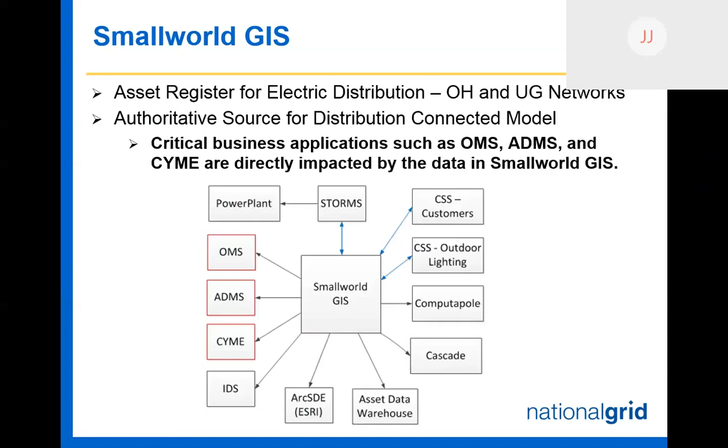So, data management and quality. There could be significant data quality impacts if conflicts are resolved incorrectly. Remember to consider that more recent information may have been posted to GIS top since your design was created. You should not blindly submit your work request or file changes to top without reconciling your changes with each difference in top. You may be presented with conflicts that don't appear to be related to your work. If you're unsure about how to handle the conflicts, ask for help from another super user. Data monitoring processes will identify errors that are created by incorrectly resolving conflicts, which could result in retraining or revocation of conflict resolution privileges.

All right, so now we're going to start going through some of the material: the definitions, conflicts, how conflicts occur, conflict resolution, some examples, and helpful tips.

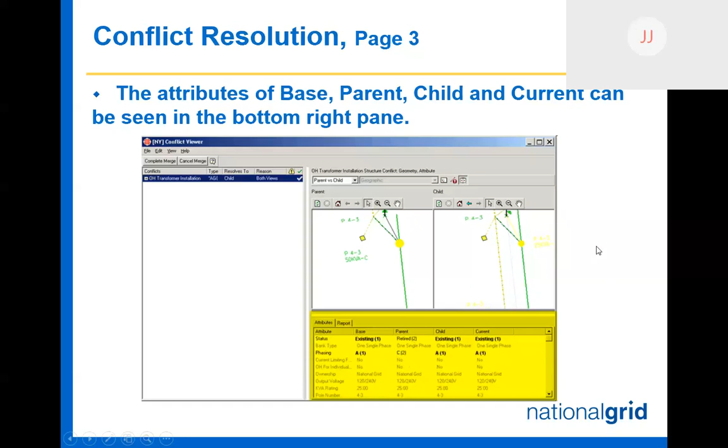The top right pane shows how the object looks, parent versus child, in GIS, giving you a graphical view of what the difference is. In this case, this was a transformer installation that was retired. You can see in parent how you get a graphical view of what the differences are. So if annotations moved, it's going to show you that difference.

By default, this opens up to parent versus child. There's a drop-down menu right here where it says parent versus child, and you can switch that to, say, base versus parent, if you wanted to compare the design when your work request was taken out versus how it looks now. I'll show you how to do that when we get into the live examples.

The navigation in these windows is pretty much the same as out in the main GIS. You've got the hand tool so you can pan around, you can zoom in and out, and there's a home button that will center the map view right on the object you currently have selected for conflict resolution.

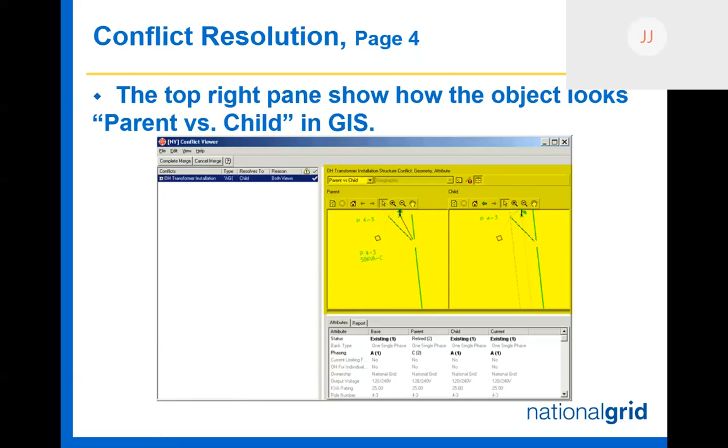This is where I was talking about getting into hybrid conflict resolution, where you may want to keep some attributes from one of the data sets but keep the geometry from another. You can go in and edit those objects in the GIS editor, and I'll show you how to do that. You right-click on the object in the left side of the conflict pane and select Edit Object, which brings the object's editor up in GIS.

From here, you can do a go-to to see how the object currently looks in your work request or file. You may also make changes directly in the object's editor rather than selecting parent or child. These updates will be shown under the current column.

An example of that would be: you move the pole in your work request, so in turn the primary moved. But in the meantime, somebody went into top and changed the phasing on a tap, going from A to C phase on a single phase tap. So you want to keep the geometry change you made in your work request, and geometry basically means the object's location.

You're moving it, and you want to keep that change, but you also want the phasing change. So you get into where you need to go, click Edit, and go in and change that phasing in the editor. I'll show you how to do that when we go through the live examples.

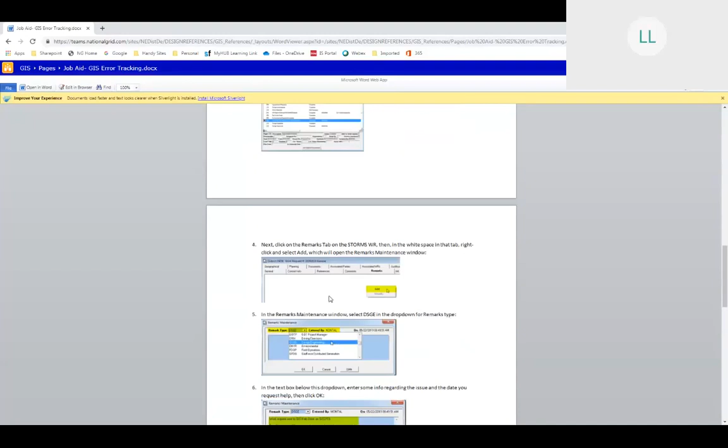So the next couple of pages just talk about adding that additional requirement and what we're specifically looking for in the design remark. And then we're going to have a report coming out for that. So that's there for you to refer to on the SharePoint site.

And for our issue tracker, that one's over here. All right, so I looked at a couple of these yesterday, and I think some of them are closed out. So let's see, I think it was probably this one -- Marcial, this one of yours, I think that was closed.

So on this list, it has a number of items here, and if you scroll over it, there's going to be a block here that you can check. And then you go up here and you say edit item, and then pull up everything in a list here, and you can update it as you go. So I think this one here, Marcial, I think it was status 60 -- I think this one's resolved. Is that true?

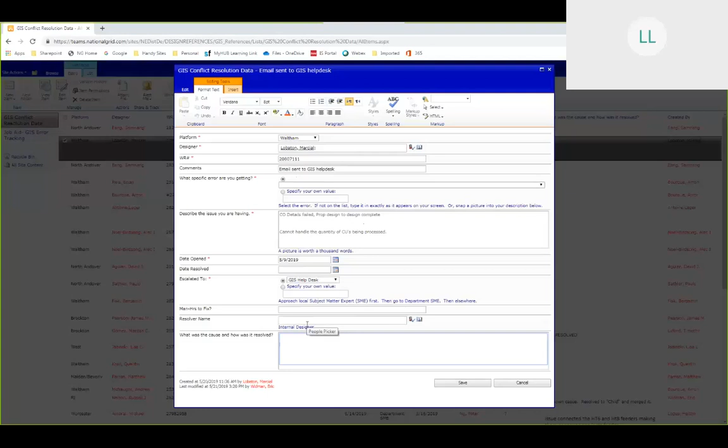If you want to add a new issue, you just click on one of these down here, go ahead and put it in there, and then reach out to the folks — if you can solve it on your own, do that. If you can't, reach out to somebody else to help you out, and at the very least the help desk. When you get the response back that it's fixed, ask them, hey, what was the resolution, how did you fix it? And if it was something a designer can do, or if it absolutely had to be the help desk, make that annotation in there as well to help us out.

So yeah, don't delete anything off of here, just update it as completed, and it'll scroll down — get shuffled to the bottom — and we won't have to look at them as much. Anybody got any questions on the job aid or the issue tracker here?

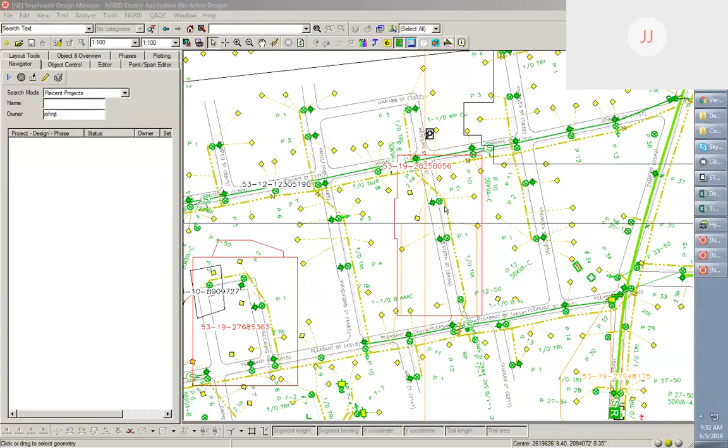All right, so I've got some teed up here ready to go, so we'll go ahead and start working through some of those.

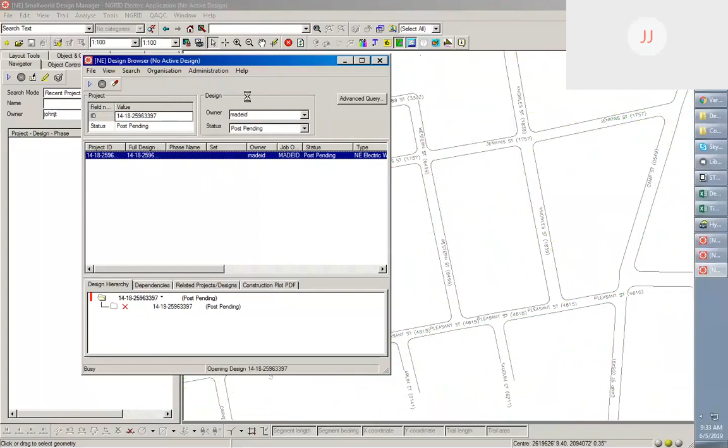I'd like to know where you're working because that speed is unbelievable — I've been opening up a work request for 15 minutes.

Yeah, I'm not — it probably is because it's read only. This one's post pending, so it's not writable right now, that might have something to do with it. But so this one, I'm just grabbing post pending work requests that we're trying to close out that have conflicts, and those are the ones we're going to work through. So I'm going to go ahead and do a refresh on this.

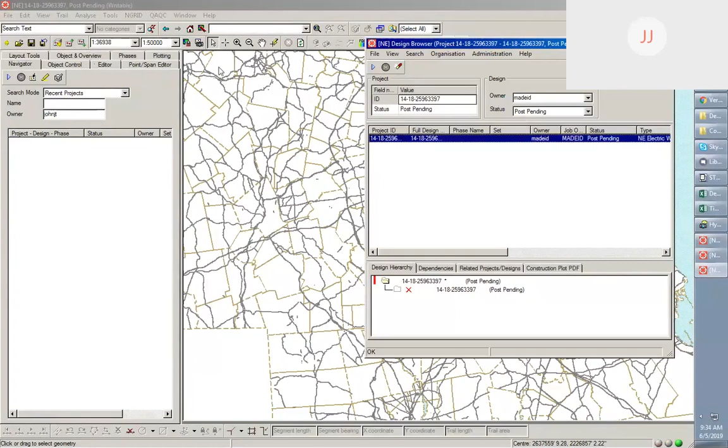So there you go, this is the pop-up that you get. I'm going to go ahead and click OK. And that is going to bring me into the conflict viewer.

Okay, so I'm just going to go through kind of the functionality of the viewer really quick. I mean, we looked a lot at this stuff in the PowerPoint, but so over here on the left, you'll see this is my list of conflicts. So this is every object that I'm going to have to go through and take a look at and resolve conflicts on here in this work request.

You can look at them one at a time. If I just click, you see it's taking me to where the conflict is and highlighting it for me. Or I can select multiple at once — so if I just click this first one and then click the shift key and click on that second one, it's going to allow me to look at both of those conflicts at one time. So you could do that with all of them if you wanted to.

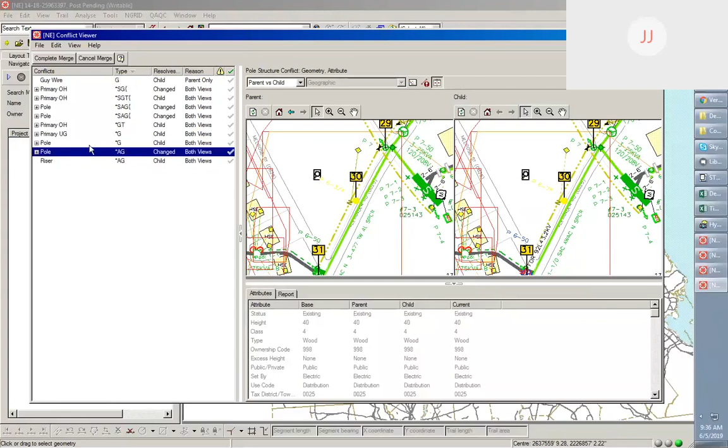Can I ask a question? When you clicked on pole before, down below, nothing was highlighted between the base, parent, child, and current views. Did you say something should appear there? Yeah, generally it should. When you're grabbing a bunch like this, it looks like it only shows you the first one you grabbed, so you'd have to go through each to figure out how you wanted to resolve it. You can resolve multiple conflicts either way, but there are pretty limited circumstances where you'd want to. But isn't the only place to figure out what you want to resolve to that space below, comparing the different views?

Right, so when you select multiple here, you can look at it graphically in the window, but if you want to see the attributes, you've got to select them one at a time.

The other thing you see over here, I've got a bunch of objects with a plus next to them. If I start clicking on those, it shows me any child objects that may be underneath, so you'll want to take a look at those as well if it has them.

You can see it changes how they look based on whether there's a conflict or not. Out here on this piece of primary, all my attributes up top are in this light gray color - if you see them in light gray, that means there's not a conflict. But if I scroll down to the bottom, you can see a difference with the route geometry, which is basically the way the wire runs and how it's snapped up to the poles. And then I have some other conflicts here for annotations.

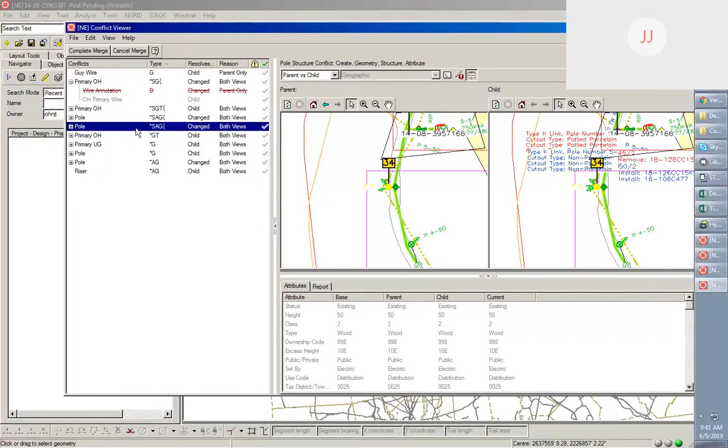So again, if I went in and made changes and wanted to use that cancel merge, but I had already resolved a couple conflicts, it's going to want you to use the undo to last save button right here. You'll click on that. It'll say, are you sure you really want to do that? Click yes, and then it'll come up and say that conflicts were not handled, and then you can go ahead and get out of the work request.

Again, that would be for if you weren't sure what you were doing and you wanted to get out and have somebody else take a look at that.

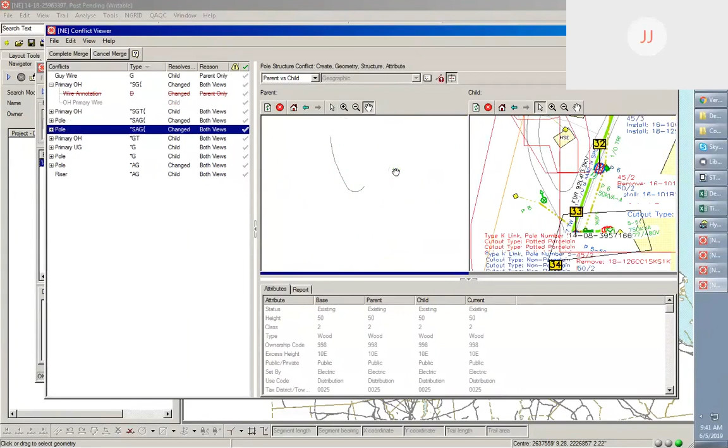Over here on the right side, you've got the graphical map view. So when you start clicking around on the different conflicts, it's going to go ahead and update that. Interacting with this is pretty much the same as you would out in GIS. Like if I use this pan tool, it's going to take me around and change the map view. If I look at something way far away and I want to get back to what I was looking at, I just click on that home button. You can also use the back and forward button right here to go through your changes. Like I said, this is pretty much the same as it is out in the regular map view in GIS.

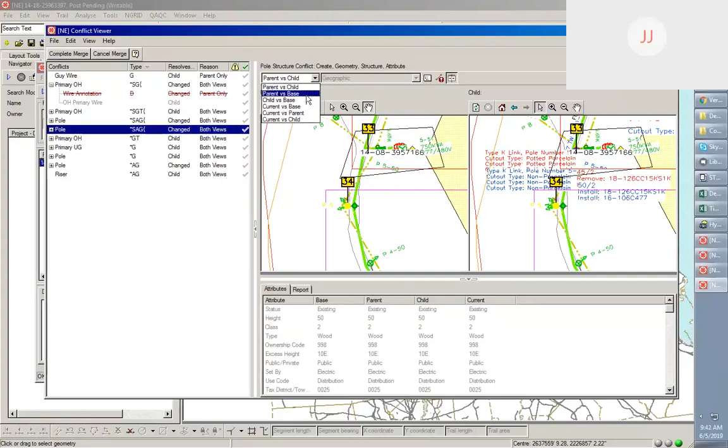Now, if I wanted to, say, compare base to parent, all you've got to do is click here, and we'll do parent versus base. And then you can see that it updates this map view here. So most of the time you're going to want to stay in parent versus child, but there may be situations where you want to switch the map view to see the differences in the map view. That's how you do that up here under this menu.

Okay, and then down on the bottom here, you've got your attribute list: base, parent, child, current. Again, attributes that are not in conflict are going to show up in this light gray color. So you want to scroll all the way down the list and look at what changes have been made.

So you see here, we've got a conflict on this foreign pole number right here, and we also have one for the GPS location as well. So you want to look at these attributes that show up bold like that. Attributes where there's no difference will show up in that light gray.

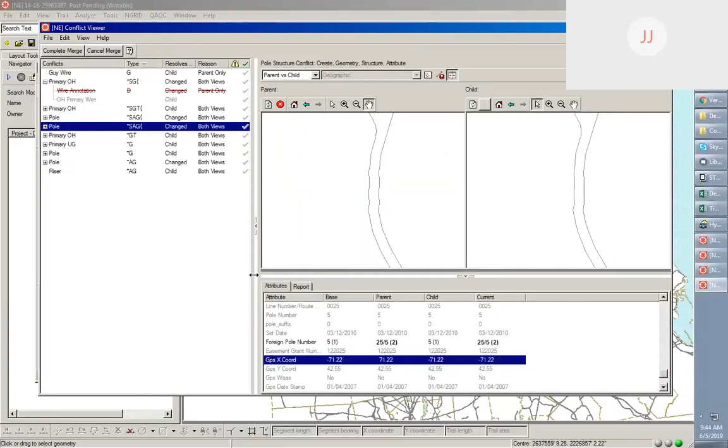As far as configuring this, you can grab, if you hover right over the middle here, you can take this and resize it, if you want to see more or less of the conflict list. And then you can also collapse that totally - there's this little arrow right here. If I click on that, that's going to collapse the conflict list. Click it again, it's going to bring it back. Same thing with this one right here. If maybe you wanted a little bit more space to compare, you can do that. But most of the time you're going to want to have both of these menus open and visible.

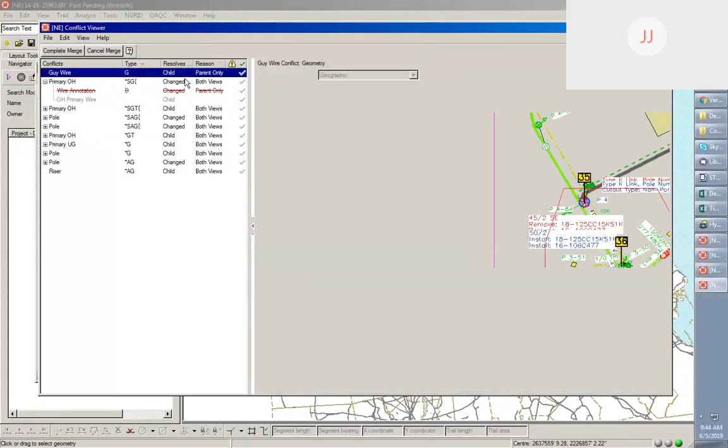What else am I missing here? So when we go in and start making changes, you're going to see you've got this checkbox right over here to the right. When we go in and interactively make changes doing conflict resolution, it's going to automatically put a check mark next to this.

If you get into one of those situations where you don't need to make changes to what you're resolving - say it picked child, like for this one right here, and we wanted to keep child - you don't have to change that, but you can go in and put a check mark next to it so you know, hey, I looked at it, that one's good to go. But if you go in and use the resolve tool, it's going to automatically put that check mark next to it. So just a handy tool, you know, with these bigger work requests that have been sitting out for a while. We don't really have a ton of conflicts in this one, there's like 10, 8, whatever.

You know, we do see work requests that have been sitting open from time to time. They might have like 50 conflicts. So it's a lot more time consuming going through that list, and obviously you want some visual indicator of what you've already looked at.

All right, so I'm just going to go through this first one here and show you guys the resolution, and then we'll go through and I'll pick people from the phone, and you guys will get to pick what you think we should be picking for the conflict resolution. So when you want to pick your resolution, I'm just highlighting one of the conflicts, and then I right-click on it, and that's going to bring up this whole menu here.

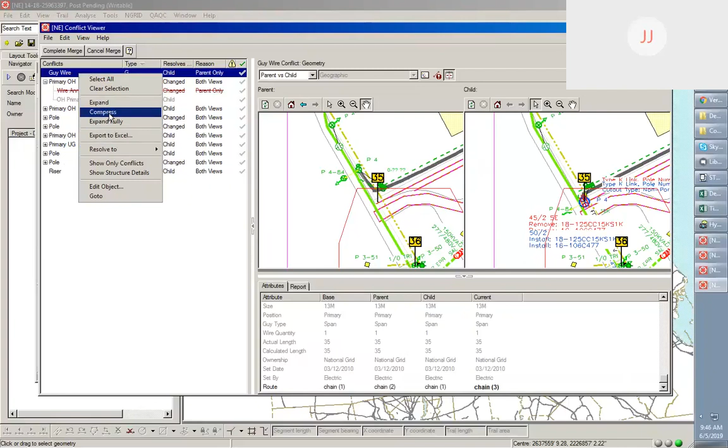So the Resolve menus here, you see I've got that parent-child base, and then you've got the expand and compress where it will open and close the objects if they have child objects. And then this one's kind of handy - a lot of times you're going to want to see all the information, but if I click on Show Only Conflicts, that's going to get rid of any objects with child objects that don't have conflicts between the different versions. So it kind of simplifies what you're looking at.

You can also do a go-to from here. That'll just pan you over to the object, and then this is also where you edit, access that edit tool.

So is it keeping up in the WebEx? Are you guys able to see my clicks as I'm opening menus and things? Okay, I just wanted to make sure because sometimes there's a little bit of a lag. So if it starts lagging, just let me know and I'll slow down.

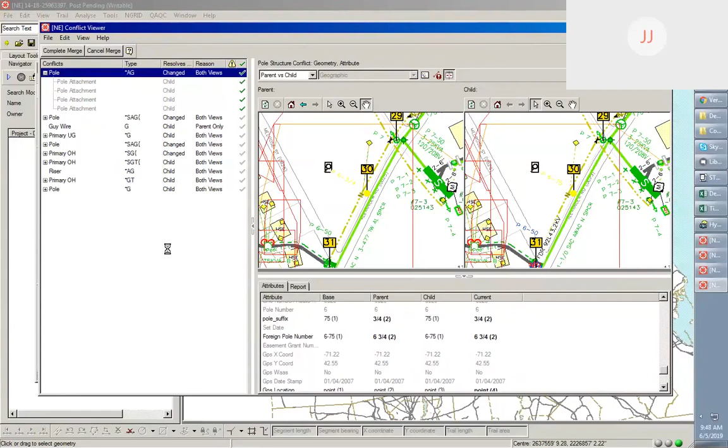So if I wanted to go in and edit this pole, I could do that. If I right-click here now and I go to Edit Object, it's going to think here for a second. There you go. And then you see I can go now and edit this pole if I wanted to make changes to it manually. I can do that. You just have to use that update button after you make the changes.

So like I said, you get into doing things like this where you can't really pick in between what's in your work request and what's in top. There may be attributes from both that you want to keep, and this is how you do that.

So any questions on the functionality of the conflict viewer so far? All right, I'll take that as a no. So I'm going to go through and we're going to start doing conflict resolution on this.

So this first one that we've got here, we've got an attribute change and a geometry change. So I'm just looking at that right here, and it'll tell you up in the pole structure conflict, geometry, and attribute. Again, geometry is just a fancy way of saying the location of it - something's changed with it. So you see these first attributes that we have here, no conflicts.

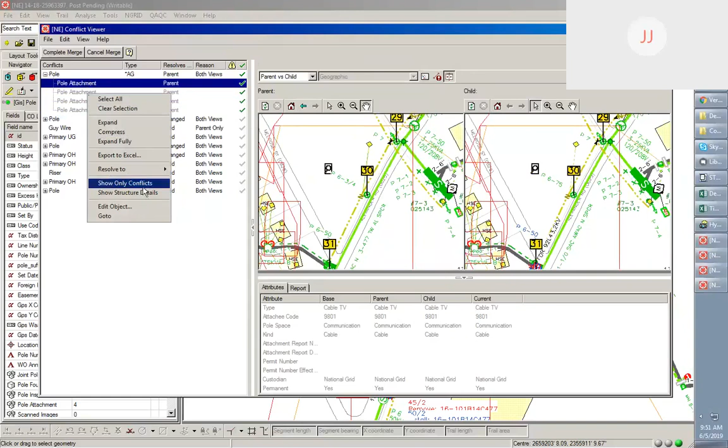And then you'll see in the conflict viewer here now, I've got check boxes next to all those objects. So again, you don't need to look at the child objects on this one because there's no conflicts - they'll show up in gray like that. Like I said before, you can shut those off if you don't want to see them, but there may be some instance you do. If you do want to turn the non-conflict objects off, click that show only conflicts, and then it'll go ahead and update your list.

All right, so we took care of that first one. The second one here, let's see what difference we have. So let's see here, we've replaced our pole. Here in the work request, we went from a 45 to a 50.

Then we have a difference here in the excess height. This is a 5 foot up in top, and in child, there's no excess height, so we were replacing it because we needed to go up. And you come down to the set date here, up in top, you see the set date 3/12, down in child, nothing because there is no set date, it's a replaced pole.

The set date will get set when it goes to close out. And then down here in the bottom, you can see we've got a bunch of different differences in the annotations. And if I zoom in here, you can see the difference in where that pole was moved. So up in top, it's over here.

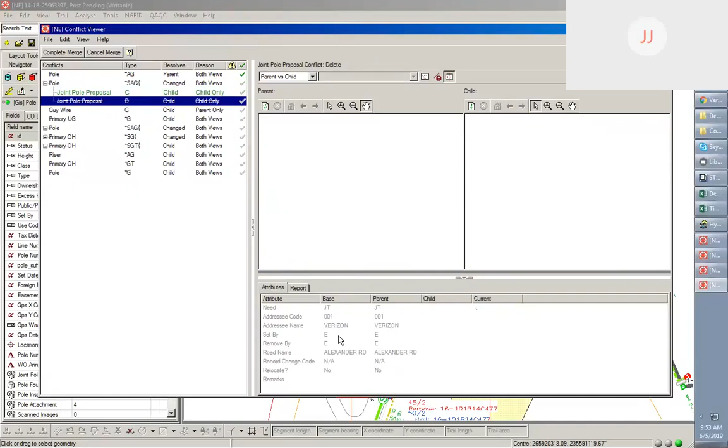That's just going to show up under child because the pole was replaced. And then if I click on this one, you'll see here's the JPP from the parent object. So this one, we're going to want to resolve the child. I'm going to right click and do resolve the child. All right, this was a good example.

So you're going to see if there's associated objects with your conflict that it wants to take together. If in this instance we've got a pole with a whole bunch of wires snapped up to it, it's not going to want to let you resolve just that part, it's going to take all those associated objects with it. So it's going to give you this pop-up. It's not very helpful at this point because it's going to tell you all these things depending on how you resolve the conflicts, it's going to show you all the objects here.

So I'm going to go ahead and click yes on this. And then you see it's showing me in the viewer, it grabbed all those objects associated with that pole and resolved them to child as well to take those changes. Now, this would be something that you would want to review. So for this pole and all these objects here, I want to take a look through them and make sure that there isn't anything we're missing, attributes that were changed.

So we'll start up here at the pole. We already looked at that. We know that this one's good. We want to take what's in the work request, okay? The guy wire here, let's take a look through here and see what's dealing with this.

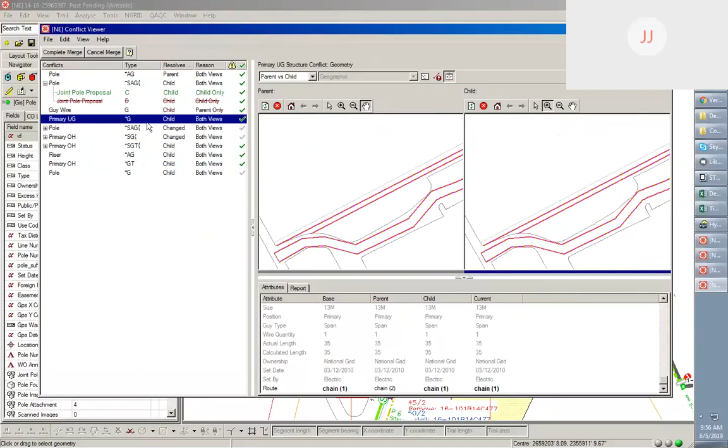On our primary underground, if I look here, you see the difference in the route. If I zoom in here, it might be a little bit difficult to see, but you see, I can see the old location where it was going over here to where the pole was previously, and then over here in child, it's now snapped up to my replaced pole over here.

All right, and down to our pole here. We're going to take a look at, or actually let's finish up with the rest of the ones that it resolved with our pole here. So you can see this piece of primary right here. We've got just some differences in the route of it.

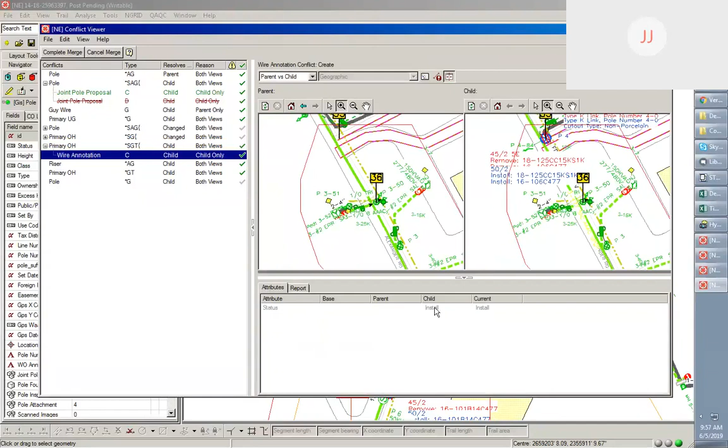And then you see the wire annotation. The annotation conflicts are very common. You're going to see those all the time, but this is just showing that we have an install wire annotation on the piece of primary here, and you can see that highlighted here in the window. So we're good on that one. So let's take a look at this riser.

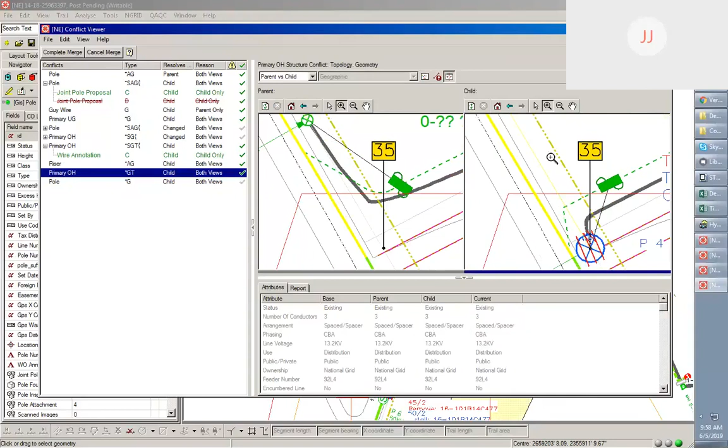So this one, yep, we want to keep — this grabs all the conflicts associated with that object. This riser is where we want it to be, it's in replace status. And same thing over here, we've got the piece of primary on the other side, just snapped up to that new pole location it's been corrected to. You can tell now that all these other conflicts were associated with how I resolved this pole here, with the check marks there.

And then you see that turns all those check boxes to green. Can I ask a question? So the child says 5 on the pole numbers where you were just a moment ago. So the child is what — right there, the child was what was changed in the work request, right?

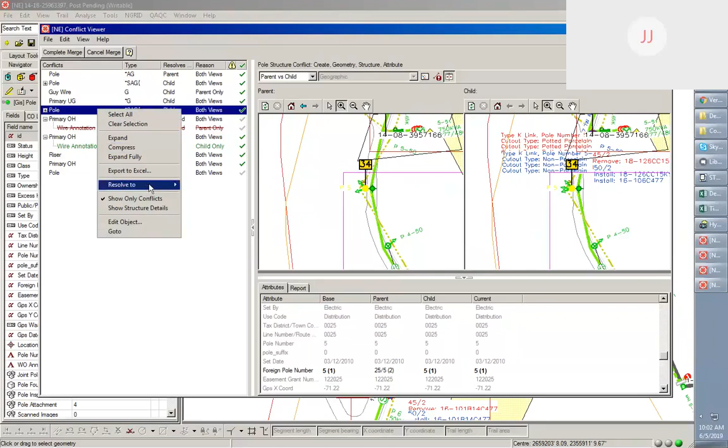So I've already gone in and hit — and this is what I was saying before — if you mess something up and think 'oh man, I really want to change that,' if I go back to that conflict and hit child, you'll see it updates current to what I set it to. So you can go in and make changes to that. Like I said, the complete merge is the point of no return — once you do that, you can't make any changes to the conflicts.

All right, so we've got a couple more to look at. We've got a primary OH here, you can see, and it looks like it snaps right up to — let's see, is this going to our design here? So I'm going to zoom in and take a look at that. Okay, so you can see this one triggered because it's associated with something that we did here at design point 3.

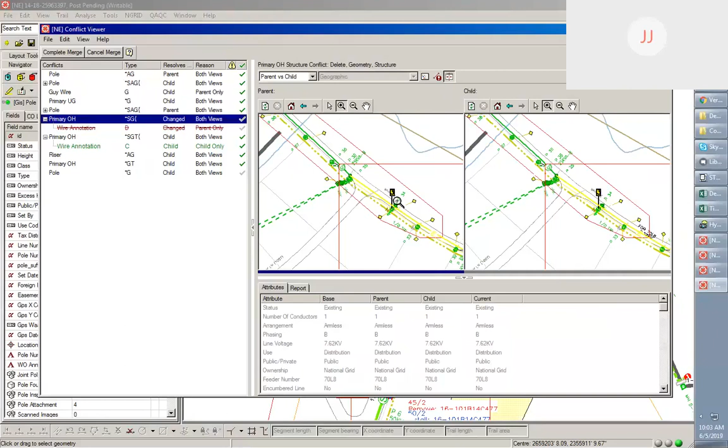So I don't think I mentioned it yet — this is important. When it's triggering conflicts, like in that last example, when I resolved for that pole, it grabbed everything in forced resolution for all the objects. So when there's conflicts, GIS basically creates a buffer when evaluating what it's looking at. So say you might only be changing a pole, but if there's wires, primary, secondary, services, guy wires, street light, whatever attached to it, it's going to look at those as well to see if there's conflicts with those objects. So it creates a buffer area around your work request, where you're making changes, where it's going to evaluate them.

All right, so for this piece of primary here, this one's pretty simple — this is just an annotation difference. The location of the line voltage anno and the feeder number anno changed. So if I go down the line here, you should be able to see that — right there in the work request. Let me zoom in, you've got the annotations, so you'll see stuff like that. This would be an example where we would want to keep what's in child.

So we're keeping those annotations that we put in the work request. All right, and last but not least, we've got this last pole here. So let's see what we got doing with that. Take a look at our attributes.

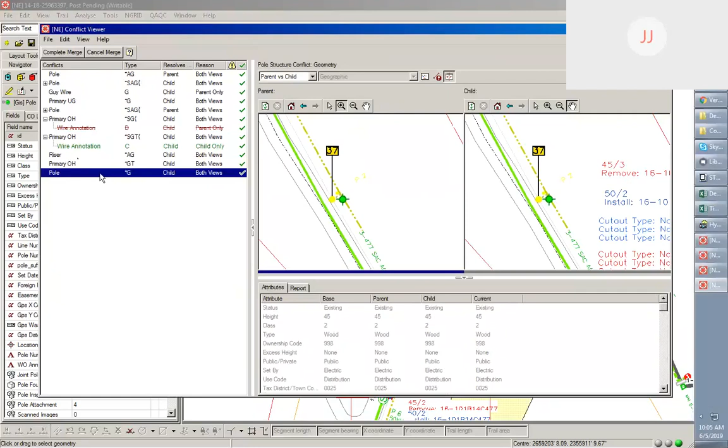Okay, this one, it looks like it just triggered for the GPS location. There was an update to that. So I'm going to go ahead and just keep what's in child. So again, for these where you're not making any changes, you can manually click that green checkbox to indicate that you made a change there.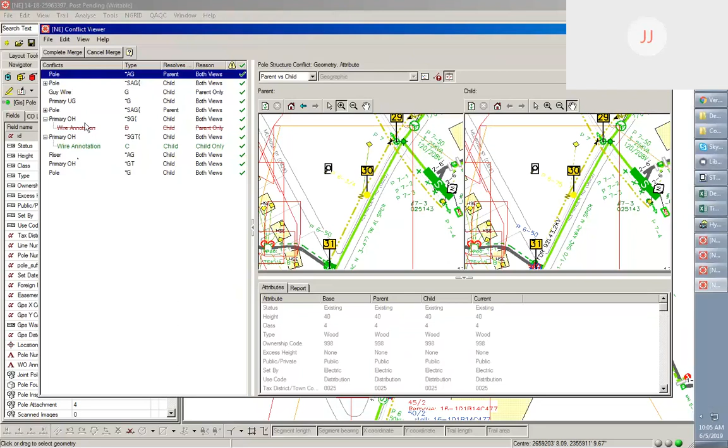So this is a pretty meaty example for us to look at for our first one, but it was a good one because you guys got to see a lot of different point objects like poles and spans and stuff like that as well. And you got to see how it tries to group the conflicts together. If there's a difference, like we had in this one right here, up top we've got the poles over here, the stub poles over here, but then in the work request where the pole's getting replaced, the planner corrected it to look like it does out in the field. They moved everything over to here and snapped all the conductors, trench, and all that up to it.

So any questions on anything that I did? Are you all asleep? Well, feedback here is good. Keep going.

All right, so at this point, I got everything green here. I've looked at these. I am confident in my selection, so I'm ready to complete my merge. So I'm going to go ahead and click on Complete Merge.

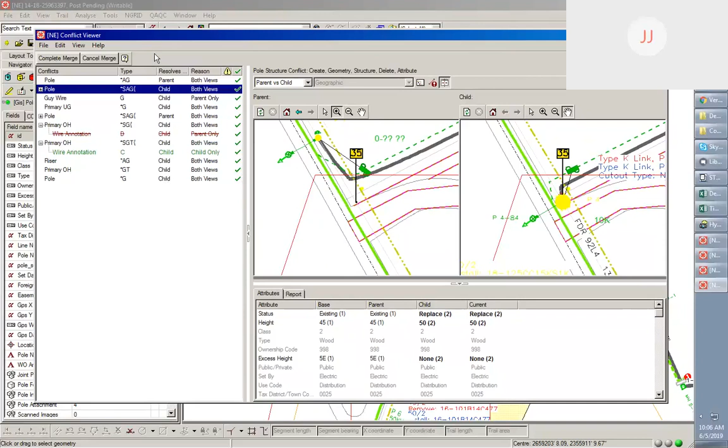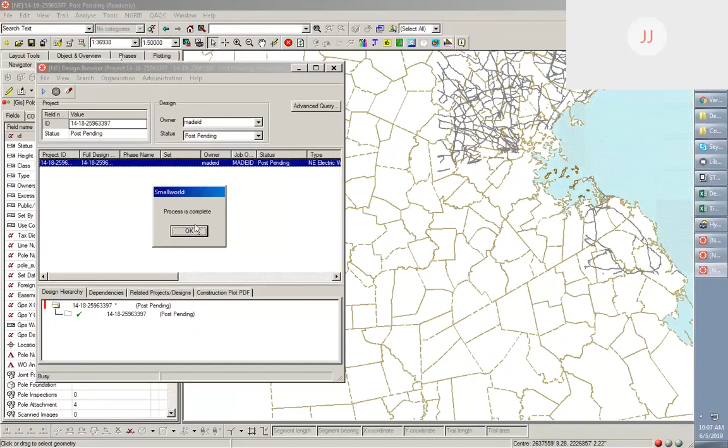You'll get this pop-up here. The merge is complete. The conflict viewer will go away. And you'll get that process is complete, and we're good to go. And then I will come back after the call and post this work request.

All right, so let's go ahead and take a look at another example, and I am going to pick on somebody on the phone. This is an oldie but a goodie. This one's from, looks like it's from 2010.

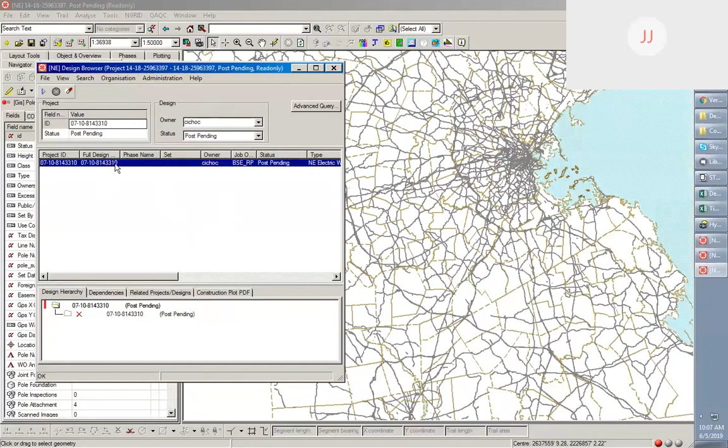And yeah, you have that refresh design in two spots. You got it up here in the main menu, and then you also have it under the file menu. You can use either of them when you're doing the refresh.

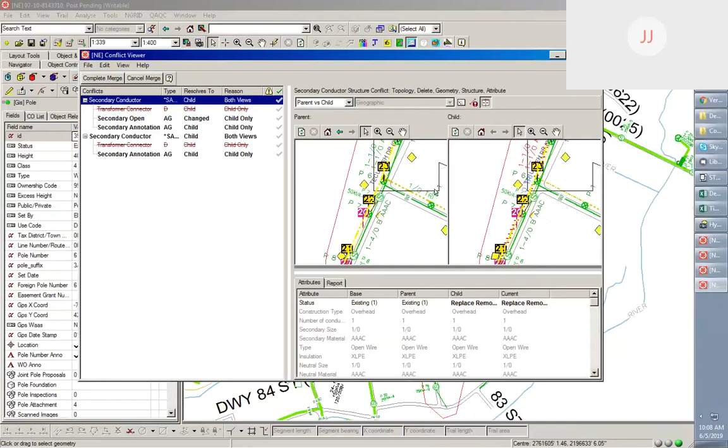All right, so for this piece of secondary conductor here, got a few things going on. So it's been replaced. We can tell that by, we're existing in base and parent, but in child, we're replace, remove. So presumably we want to keep that change, but we got to look down through here and see if we have any other attributes that are in conflict.

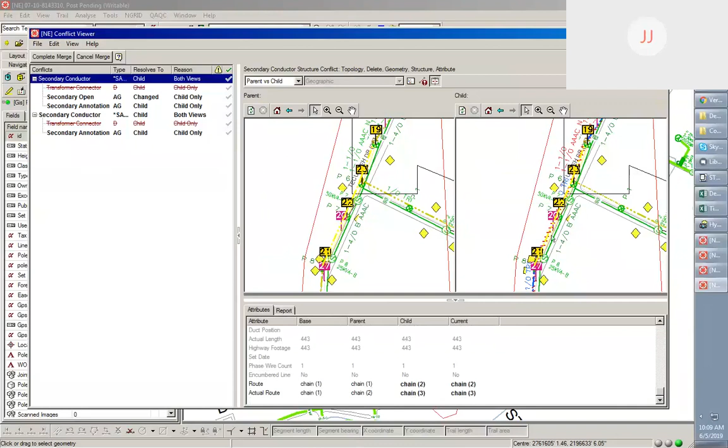So you'll see here, we've got a difference between parent and what's in child, which is what I would expect to see because this piece of wire has been replaced. And it looks like we've got, if we take a look here, oh hold on. Yeah, if you take a look through here, yeah, it looks like somewhere it got changed slightly with the route of the wire.

And then down below we've got a net cut. Let's zoom in, look at that. All right, it looks like the location of this changed slightly. That's why it triggered a conflict on that.

Oh, and the piece, yeah, this is just telling me, so when you replace a piece of wire, it gives it a different GIS ID, so there's a difference with which piece of secondary conductor that net cut is associated with. So you can see here for parent, the existing wire, 247591111, and then over here in child, we've got a different GIS ID. So something changed on this piece of secondary.

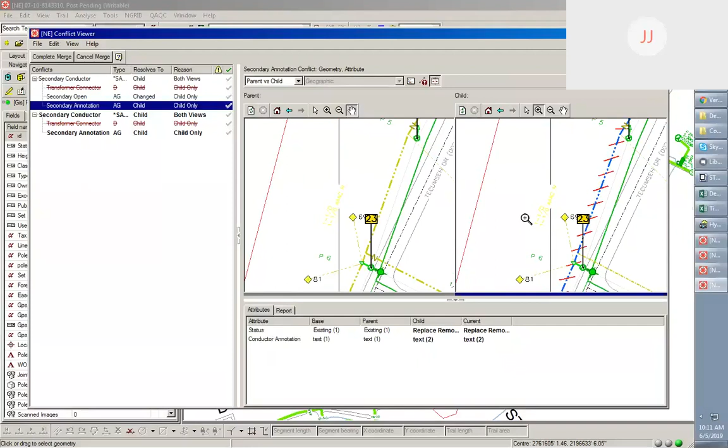Jeremy, would that be consistent with they just upgraded the secondary cable? Yep. Okay, so this could be a pretty typical conflict then, right? Oh yeah, I mean you'll see a lot of stuff like this where if there's any change to the wire, whether it's an annotation or the route, it's gonna trigger a conflict on that in between what's in parent and what's in your work request. Okay.

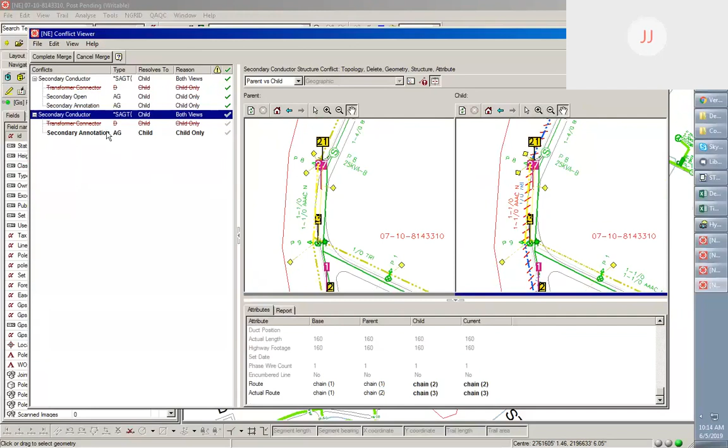Yep. So yeah, there were a couple changes on this one. It looks like the route of the wire actually changed a tiny bit in between what's in top and what's in our job. Yeah, let me zoom in here a little bit and see if we can see the difference.

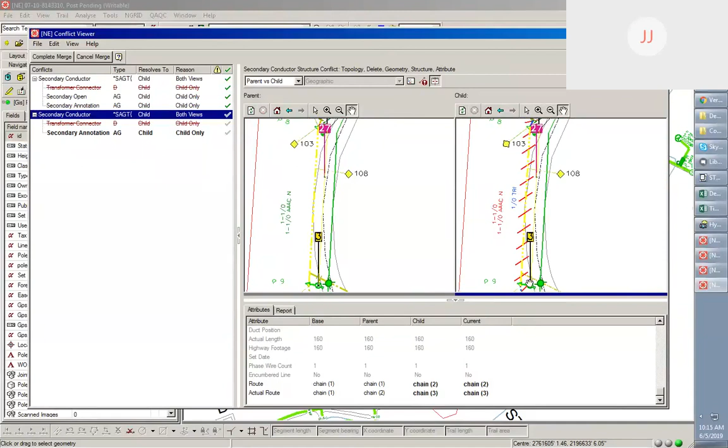It's sometimes hard to tell when you're looking at it in the conflict viewer because it turns it into that yellow color for whatever you have highlighted. But presumably when we replace this wire here, there was some change made to it that we want to keep. And then if I look at the annotation, yeah, we want to keep that as replace remove, because that's what we did in our job.

So this is another one that set to child. So you see, the conflict viewer will try to make a decision when it does the merge, what it thinks you're going to want to resolve to. So you see this one's already set to child, so I don't have to change anything. You can go in and do the resolve to child and it's going to check those boxes, or you can just click on those.

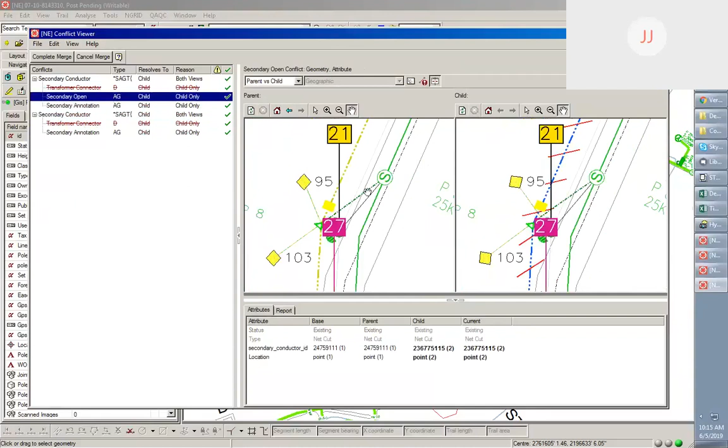But no, so this one we want to keep all those changes that were made in this job. We looked at all the associated objects with the opens and everything. We're going to be good from a connectivity standpoint, so we're good to resolve to child on this one. So good job, Diane. Hey Jeremy, this is Lauren.

Just to touch on something Diane said earlier: sometimes it's hard to be objective when you're looking at the work you did in your work request. So when you say 'I want to keep what's in the job because then if I don't, I have to redo it' - well, sometimes that may be the case. But you may, in some situations, need to take what's in parent, bring it down into your job, and then do a replace on that object. So I just want everyone to keep in mind that may be the situation you're in. You can't always just default to what's in the work request.

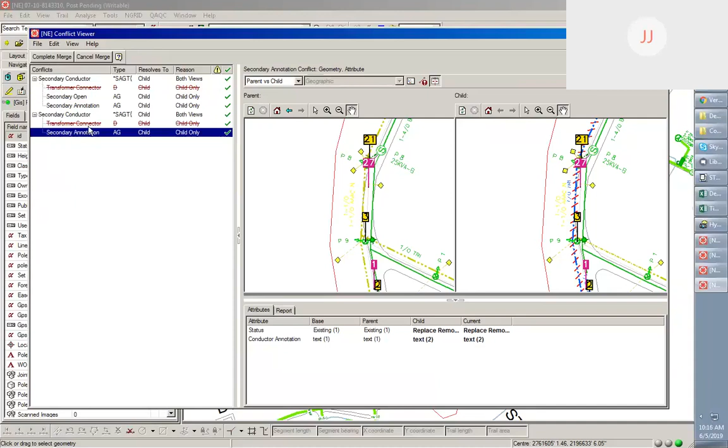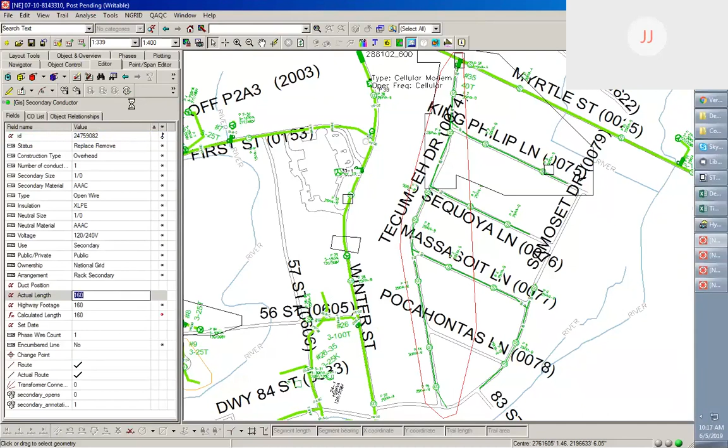Yeah, and there's also going to be those situations too, like Lauren said, where the other option you have is going in and doing that hybrid resolution, where you may go into your piece of secondary and say there was something up in parent that you wanted to keep, but you wanted to resolve to child so that you kept it as a replaced wire. Say the length was different up in top - I could go in, change that, click update, and then I would still have that change from top, but keep it where I'm resolving to what's in my work request.

So yeah, just be conscious, like Lauren said, of always going to what's in your work request. You've got to look at the associated changes to make sure you're not breaking anything. Quick question - does it always give you a suggested resolve-to in that column?

Generally, yes. If it sees that you're replacing that object in your work request, it'll give you that suggested resolve to. In some instances, it won't.

One last question. Once you complete the merge, does it throw you right out of the job? How do you know you accomplished what you wanted to?

Sure, I can show that to you right now. This is a little bit different because I'm in a post-pending work request. This job's already been constructed. It just tried to close out and it had conflicts.

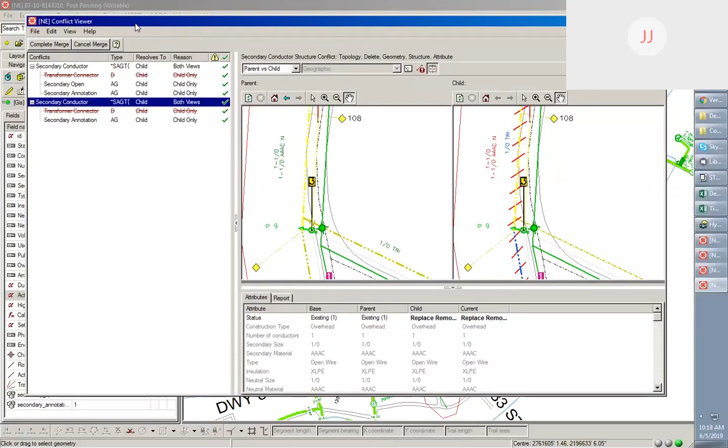If you're in something that's proposed, when you get done doing conflict resolution, it's just going to bring you right back into your job, but you'll get a pop-up. So if I click on this complete merge right now, it's going to say the merge is complete. It's going to think here for a second. And then I get a second pop-up that says process is complete. So if you were in your work request, you'd be back in there writable at this point. I'm not, this is post-pending, so it's going to stay in that read-only status.

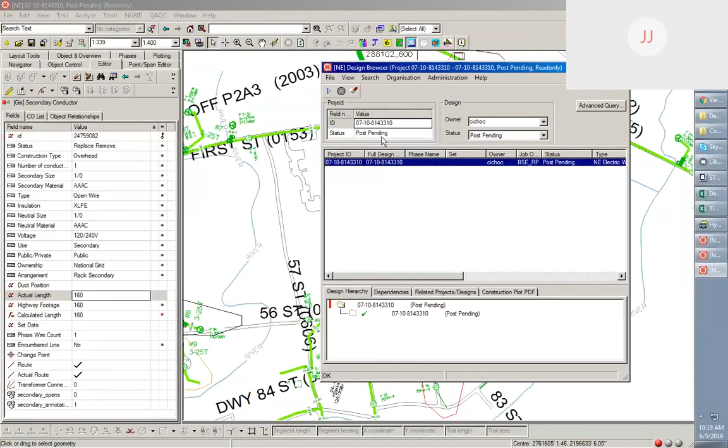So any other questions on that one? I have one other general question. Are you saying that when we are in a design and we move things around to make it more accurate to what is going on in real life, that we're creating conflicts when they try to post the job later? Yes, yep.

So that's why I was saying earlier, if you go out to the field, and right now your ESR hasn't been sent over to GIS yet, you go out to the field, you take your notes, this pole's moved here, whatever that change is - it's better to do that in a file manager before you take that job out. If you do it in a file manager and post that up to top, you're not going to create that conflict when your job goes to close out.

Because if you make the corrections in the job, and then there's that difference in between what's in top and what's in your job, somebody's going to have to resolve that on the back end and make a decision, and potentially could make it incorrectly. So it's definitely better to make those corrections in a file manager before you initiate your work request.

One last question. So you go into a design, and that's usually what you do is bring it to proposed, and you start working it, and you realize something's really off. At that point, if you get out of your design, go in and do a file manager to correct the data, then wait for it to post to top, and then go back into your design, you're automatically going to have a conflict, correct?

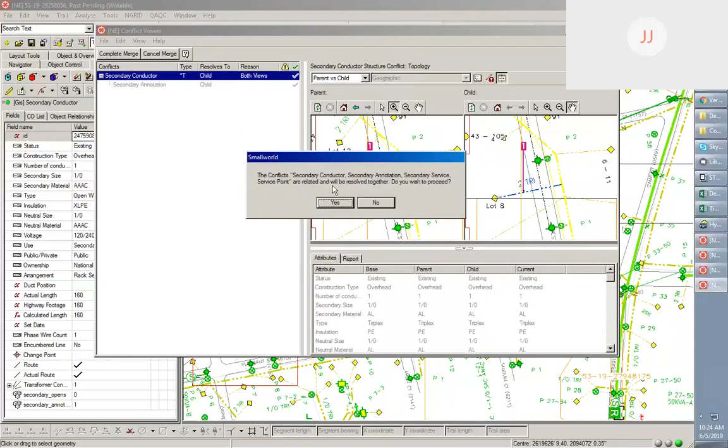Secondary conductor, secondary annotation, secondary service, and service point are related and will be resolved together. Do you wish to proceed? Yes, we do. So like I said, in some cases that pop-up, if there's a lot of stuff like that last one, it tells you what objects it's going to resolve. Basically it was just telling you here that it's going to grab that

secondary annotation associated with it and resolve that as well. In this case we don't really have to go in and review what was changed, but with a more complex example like we had in that last one, you've got to look at everything to make sure you're resolving correctly.

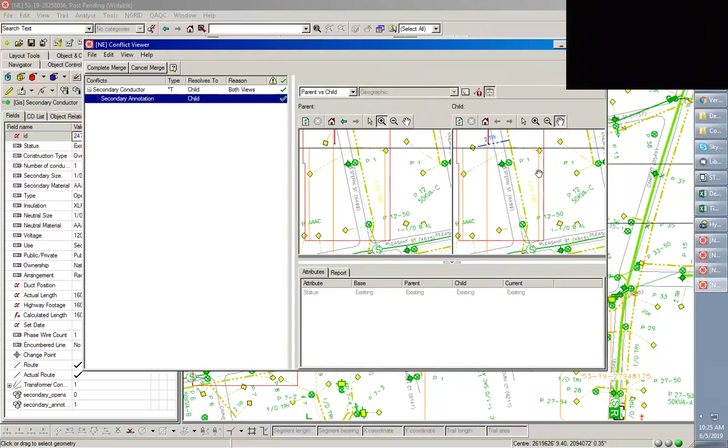Hey Jeremy, right? Yes, Jeremy, it's Sam. So in that pop-up, it noted that it was making a change to a service point, but service point isn't in the list of conflicts. So would that be something you want to track once you do the merge, if it's going to affect your service point even though you're not resolving to parent or child for that service point? Does that make sense? Yep, that question. Yeah.

Yeah, so you get into, there may be those associated objects that it's not going to show you interactively in the conflict viewer, but there's a change. So just be conscious of that.

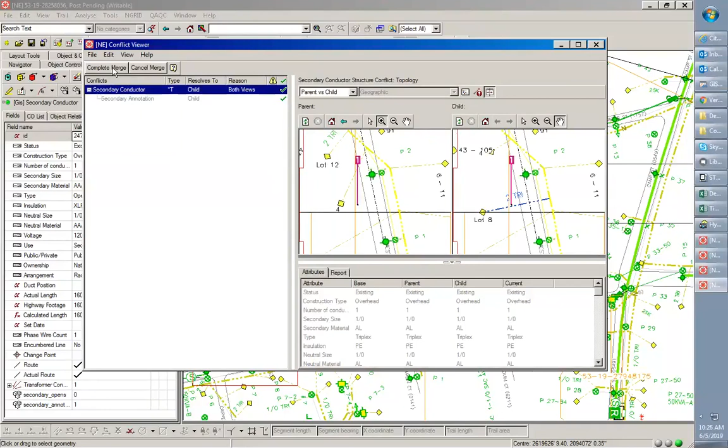All right, so we're good on this one. We've hit resolve to child. We're confident in our selections. I'm going to go ahead and click on complete merge, then click OK. And our conflicts have been resolved.

All right, let's grab another example. Bear with me for one second.

Oh hey Jeremy, this is Jim Perry. Where are you physically located? Your machine is really fast. Are you in Syracuse? I'm in Syracuse. Okay, so listen, don't jinx me. Usually, as you saw earlier, we have issues for whatever reason with the Citrix applications when you're doing WebEx, it locks up, like you saw earlier when I was trying to get started. So we'll just knock on wood and hope it keeps running like that.

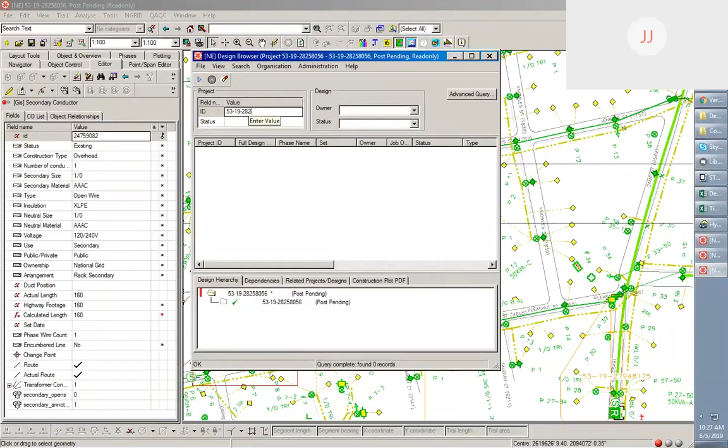All right, that one's been resolved. Let's grab another one.

All right, another victim from the phone, please. Don't all jump up at once.

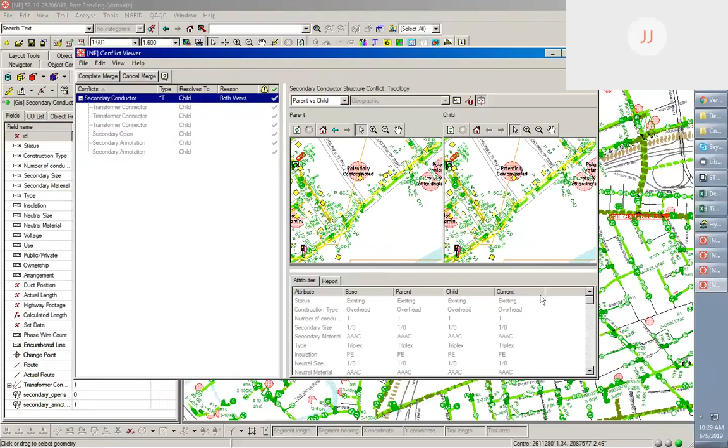All right, so I'll just go in and do this one. This is a fairly large piece of secondary conductor that's super spanned here. And if I scroll through, we look at the bottom attributes here, we can see none of these other objects, they're in the light gray, there's no conflict with them. And then if I go up top here, the topology of the wire has changed. You can see that for the type. So that just means somewhere in this wire, there's probably another piece of wire that was snapped up to it, or some kind of change.

So I'm going to zoom in down here. You can see them really small, but you see the design points here. So here was the change right here. So we had this new...

Hey Jeremy? Yeah, go ahead. Sam, when you say topology, do you mean like a vertex was added on that span? Like the geometry doesn't change, but something within the geometry changes? Okay, yep.

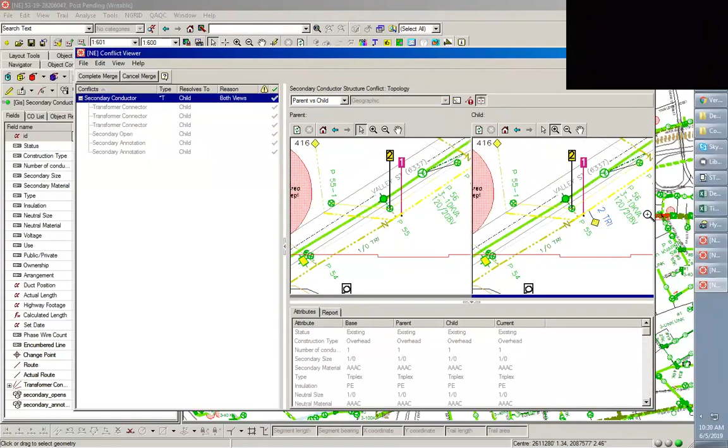So if I'm going to go out into the job here, I'll show you guys what I'm talking about really quick. And knowing how to check topology is actually good for troubleshooting where you have issues. So got this little baby piece of secondary right here that's coming off the existing piece, or I'm sorry, the little piece of service rather that's coming off our secondary.

So if you want to check topology on something to see what the difference is, let's see here, edit topology. So you go to Tools, Edit Topology, Manifolds, and then by default this is going to be opened up. It won't always open up to where it's supposed to be. You want it on GIS Electric. And then you want to check this box right here that says Nodes.

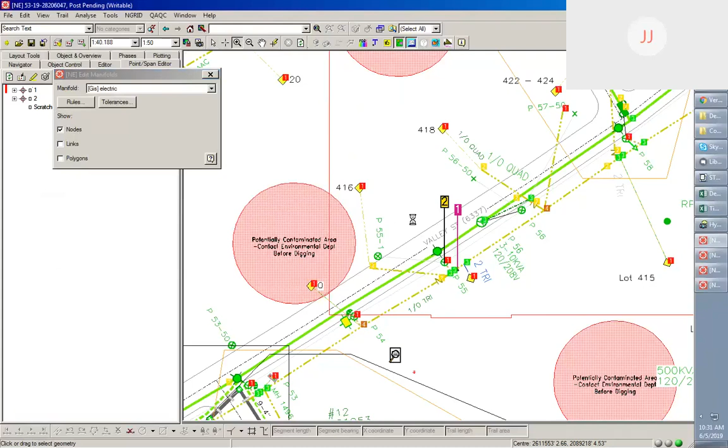And then you'll see, oh, I've got all these wonderfully colored boxes with numbers that appeared on the screen. So what that's telling you...

It basically creates those numbers based on how many connections are at that point. So a piece of service at the end here only has one connection to the service wire. Here, where it's connected to a piece of secondary, we've got a 3 because there are 3 connections. For the connector right here for the street light, we've got a 1.

So when something's snapped up, it makes that topology change. If you turn these on, that'll show you what the topology is in that area. Same thing up here - this piece of service has 1 connection to the service point, and up here it's associated with this piece of secondary, so you've got a 2 there.

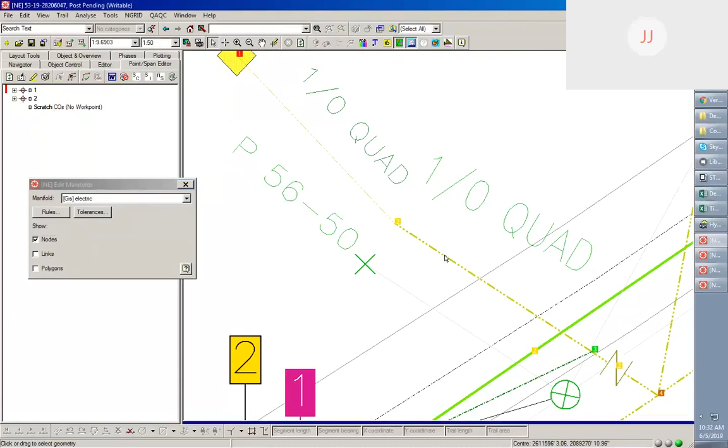So if I were to go in and change this piece of secondary right here - well, you know what, I will do it. We'll go back and change it back. So if I take this piece of secondary here and modify it, we've got the 2 there right now. Oh, hold on, just select it first. There we go. So if I take that and move that off...

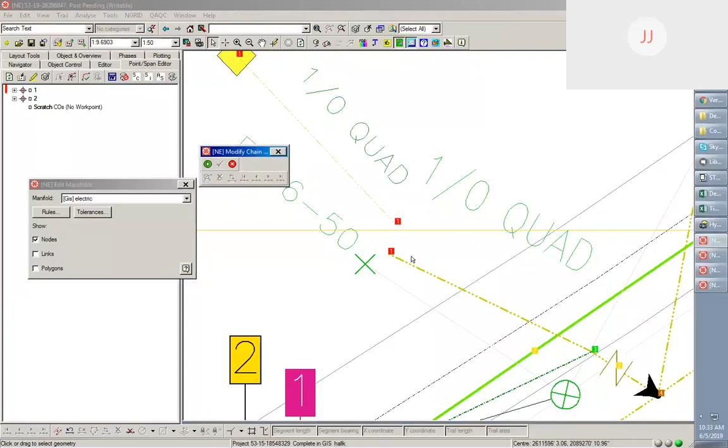I cannot GIS today, apparently. Here we go, this is what I was trying to do. See now, that changes to 1s, so I'm not connected there anymore. So it's basically just telling you, from a connectivity standpoint, how many connections you have at any given point.

So let me take that back. Actually, we can just do this.

And whoever brought up how fast things were running earlier, this is the point where I yell at you. Sorry about that, Jinx, then. Yes. Looks like it's moving along.

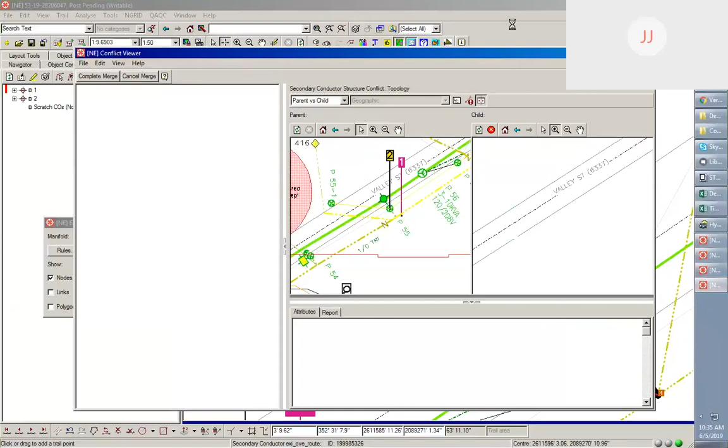All right, so we'll give it another minute here to come back. But this may be the end of the live presentation due to it being locked up.

Eric, I'll talk to you offline, but I think it would make sense maybe I can go through with the folks that are going to get the access, offline, go through a couple more examples with each one just to ensure that - give them some more experience through doing their first couple resolutions, and then we'll give them the access. So any questions on anything that I've done today?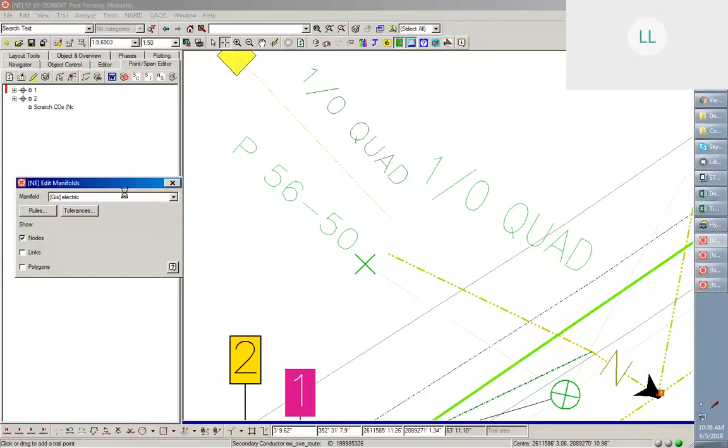Jeremy, did you take a look at audit history to show people how to see when recent changes are posted? I did not, I did that in the last session, but I did not do it here. Let me see if it's even going to let me, or if you have another GIS session open, maybe you could just show people where that is.

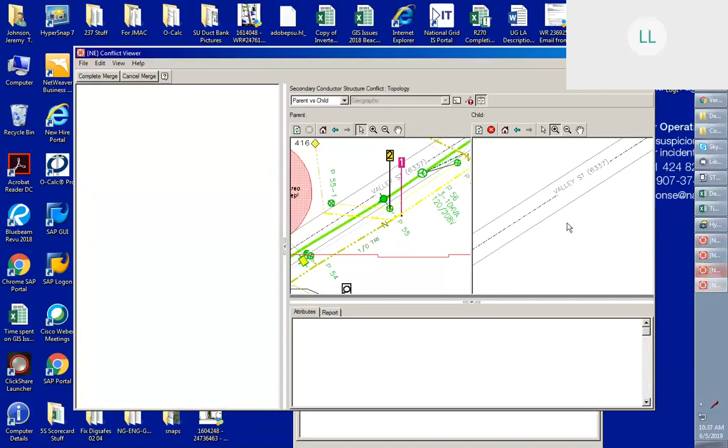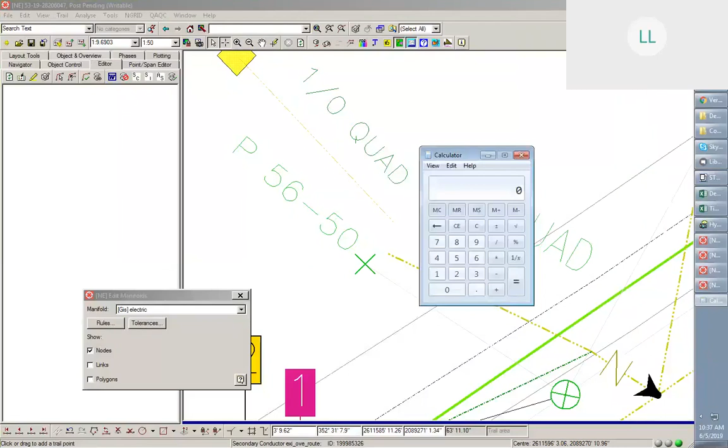So while he's doing that, let me just add a little bit of context here. There are currently 2 projects happening, the New England GIS data cleanup and the New York GIS data cleanup. And there are teams of people that are actively correcting and changing what is in top based on what our field contractors are finding. So they're sending in photos and doing field checks, and there's a team of people actually correcting data in GIS.

I think it's important to understand how to look at the audit history of a record so that you can make a decision about whether you want to keep what's in your work request or merge down what's in top and then do your design changes to that object. But I just want everyone to be aware that those 2 projects are happening right now and will be happening over the next 2 to 3 years.

Oh good, look, it's back. All right, wonderful. So let's finish up the conflict resolution, and then I can show you guys the audit history records. For this one, we want to keep what is in our child alternative here - we want that wire to be connected up to that piece of secondary. We've already got it set, resolve the child here. GIS picked that based on the changes, and that's what we want to keep.

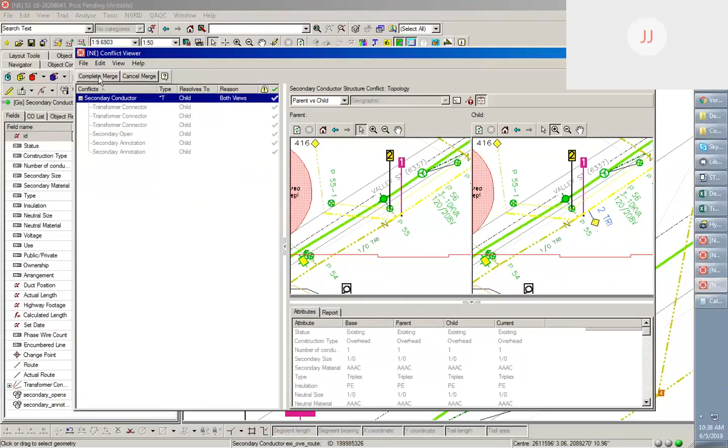So I'm going to go ahead and click on complete merge. Merge is complete. So you don't have to resolve to anything if it's already resolved - you can just complete the merge and that's it.

I mean, you want to look at it - yeah, you don't want to look at it, but if it's already selected, you don't have to do the green check mark and all that stuff. You can just... no, you don't have to. On a simple one like that, you don't have to.

So let's go back to our piece of secondary. Obviously, with these nodes turned on, it's kind of horrible to look at when you get out to a bigger area. So if you do go in and turn those nodes on to check connectivity, you just click on that, and then if I do a refresh in my map view, the nodes go away. So this is a handy tool for checking connectivity. If you're getting an error that something's not connected, if you go in and turn these on, they're sometimes really helpful if you're in a congested area.

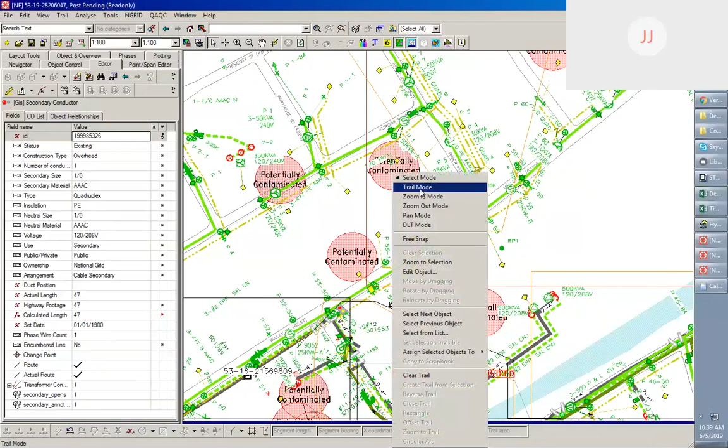So for the audit history records that Lauren was talking about, if I go into, say, this piece of triplex here, the service, and then you've got this tab over here, object relationships. If I click on that, you'll see I've got audit history with a 6 next to it.

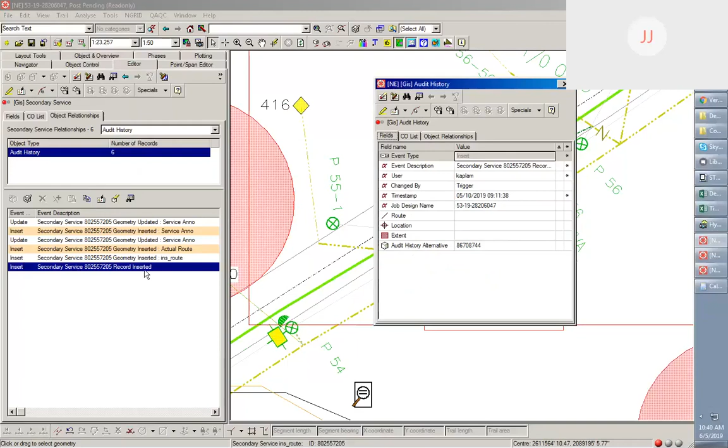So you'll see here you've got the audit history record. It sorts them from newest to oldest. So you can see here, this shows me that this piece of wire was put in on this work request back on May 10th, and shows me the user as well. And then it tracks any other changes. So you'll see right here, the geometry was inserted, I put the actual route in, and then up here, you'll see I put the annotation in there for the service as well. That's the number 2 tri install annotation that you see here.

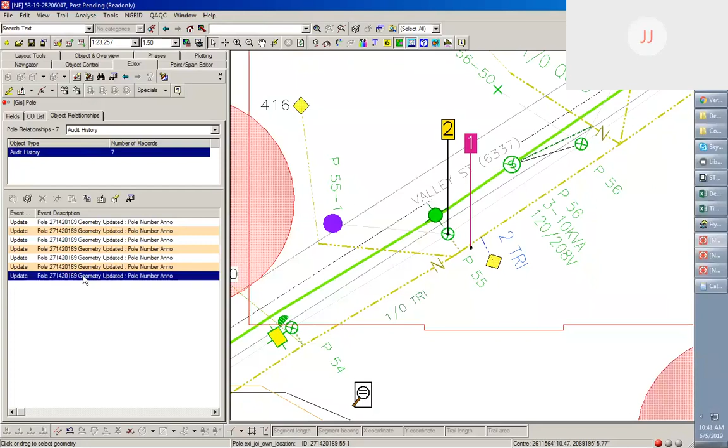So if I go to this existing pole, you see here, go into my audit history. So if it's an older object, a pole or any object that was replaced maybe back in the old system, you might not see audit history records from when it was installed. So like this one right here, it just has a bunch of pole number annotation changes. It doesn't show me who installed it and when. So you might not be able to go that far back as to when it was installed.

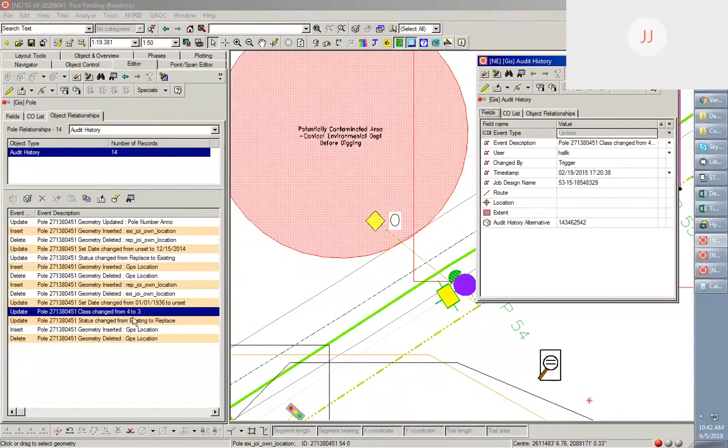So you can see like this pole right here, again it's going from oldest to newest. You can see somebody came in, made a bunch of changes, and then this is when it went to post. It set it from replace to existing. So it tracks all of those changes made by the system, say when something posts, or interactively, like this one right here, I can see somebody went in and changed the class. Presumably this was an as-built change for that pole, changing it from 4 to 3.

So those are the audit history records. They're outside of the conflict viewer. They're handy for being able to discern who made what changes to an object and when. So it's another tool to help you know when changes were made to an object and aid with your conflict resolution.